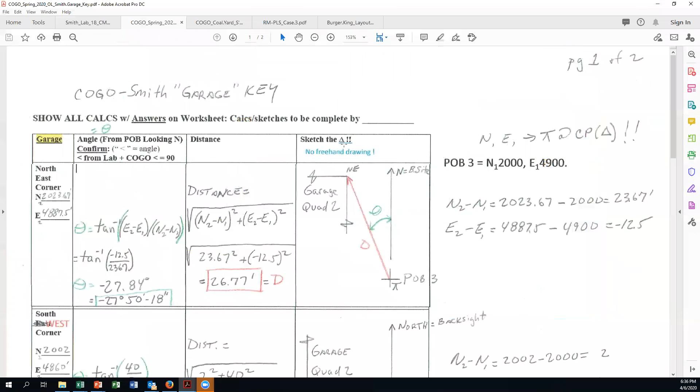So without further ado, let's go to the answer key, which should be on your screen right now. And the northeast corner of the garage - it would be the garage that was part of POB 3.

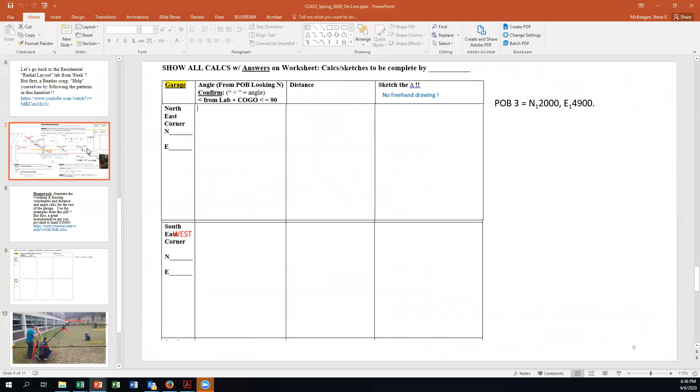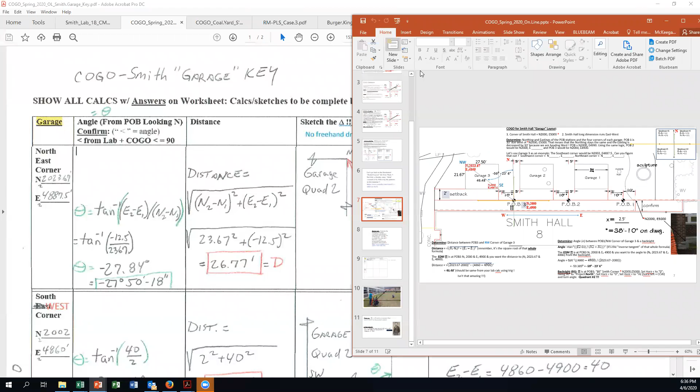So this is the northeast corner. Let's see if we can go with - there we go. So the northeast corner. Let's see, we'll go back to here. This was north 2002. So if you're going up 21.67 right there, then that's going to be 2002 plus 21.67, which is 2023.67.

Whoops, let's see. 2023.67 right in there. Okay, the easting is the same. The easting for the northeast is the same as the southeast, right? Because you're running north-south, so the easting is not going to increase or decrease. So it's 4887.5. So there's our two, that's N2E2.

We're doing all of our calcs at POB3, which we're calling N1E1, which in ancient Babylonian Sanskrit right here - what's that symbol for? Oh, let me do the... Point of instrument, the EDM. Right, so that's the symbol for - you folks weren't using EDM, you were using the theodolite, but basically it's the instrument.

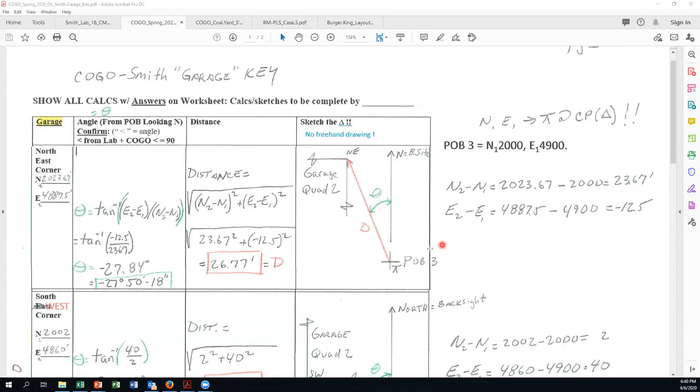If we look at the southwest corner, okay, the southwest corner.

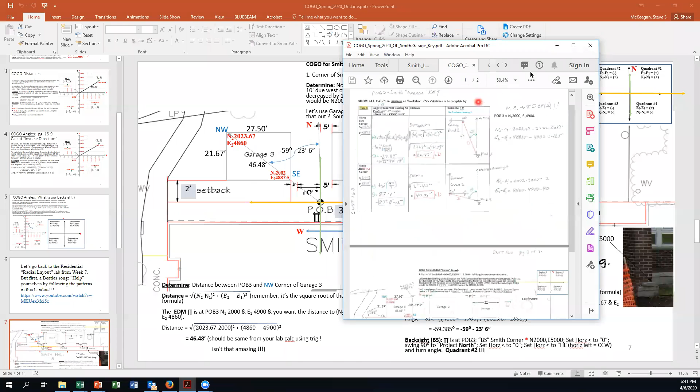Hey, I got a question. The we're basing our easting off the corner of Smith, right? The north 5,000, or north 2,000, east 5,000. It's this point right here. So how'd you end up with a negative 12.5 for your easting up there?

It's not an easting, it's a difference. It's the difference between the two eastings. Oh, okay. So N2E2 is always the point that you want to locate. N1E1 is always the point that the instrument is set up over.

Okay, these are not northing and eastings. These are differences in the eastings and differences in the northings. Same thing here. Same thing here.

Some of you, and actually, I'm glad you brought that up. I think on this, let me run that number here, 12.5 divided by, what is that, 23.67. There was something where, well, if you look on page 7, when you were putting down your formula, I think you put an extra square in there, and I think that might have been what was confusing people.

It's for the angle. Page 7? It says squared, and then you don't square it when you show your math. Right where it goes, angle equals tan inverse of E2 minus E1 divided by N2 minus N1, squared. And that square, I think, is where people were getting screwed up right there. Yeah, oh, I didn't put squared right there. Because when you run the math, it only works if you don't square everything like that.

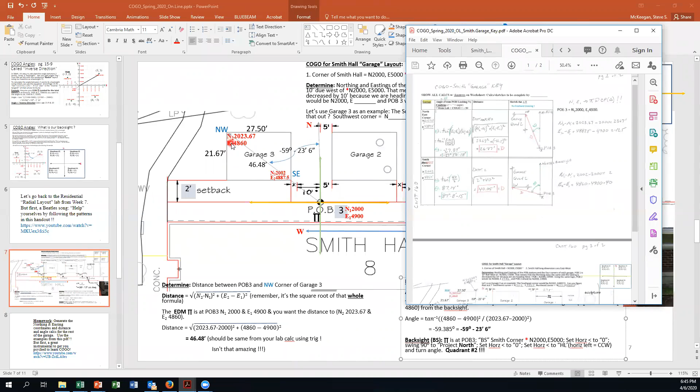So if you go back to there, N2 minus N1 is 2, E2, and that should be a negative 40, right? That should be a negative 40, shouldn't it? Yep. That should be negative.

Mr. McKeegan, I got a question. In the sketch, where that green angle symbol is, is that the angle we were finding? Because I originally thought we were finding that top left angle, like on that corner, the northeast corner.

Well, which one are you talking about? This sketch or this sketch?

The top one. Looking at the top one, for example - this is the northeast corner, and this is the southwest. The angle you're getting is always off the line from your instrument looking north.

If you're in quadrant 1 or 2, that angle is always measured off of the north. Okay, we were looking at the angle on the other side of that red line. No, because we're at POB3 and our garage is over here.

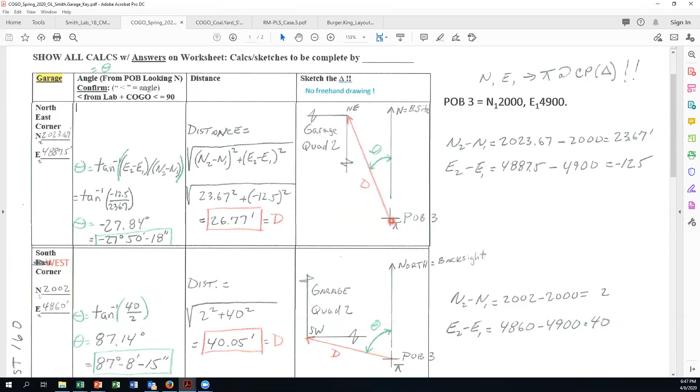Wouldn't, for the southwest corner, wouldn't that be negative 87.14 degrees? Because that'd be a negative 40 divided by 2. So you're still going to have a negative coordinate there for where it's located, correct? Yes. All right, so this would be negative, which makes this negative 40, this negative.

And then that tells you that you had a positive difference in northing and a negative difference in easting, which throws you into quadrant 2.

Because again, what we did was we threw these coordinates - remember these? In essence, you're throwing this same coordinate right here, it transfers over to your instrument setup point, and there's quadrant 1, 2, 3, and 4. So we're in quadrant 2.

Quadrant 2, the difference in eastings is negative, the difference in northings is positive. So on any quiz I give you this - typically on any quiz I give you the formulas, hopefully I do them right, and I give you the quadrants, and you got to plug and chug the numbers.

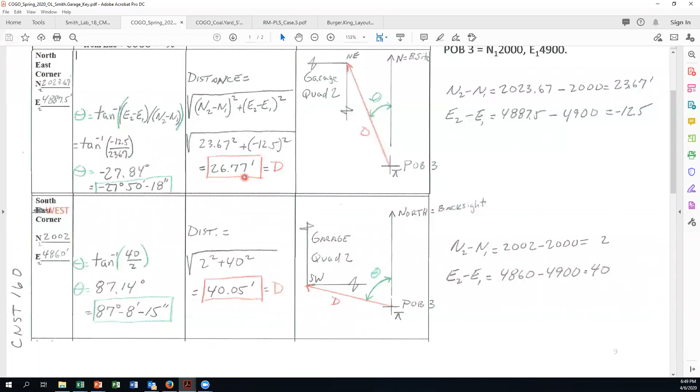And then here on this page, I didn't grade this because I only put on my handout that I wanted the other page. I didn't say I wanted this.

So, but here's POB 2, would be north 2000, east 4945.

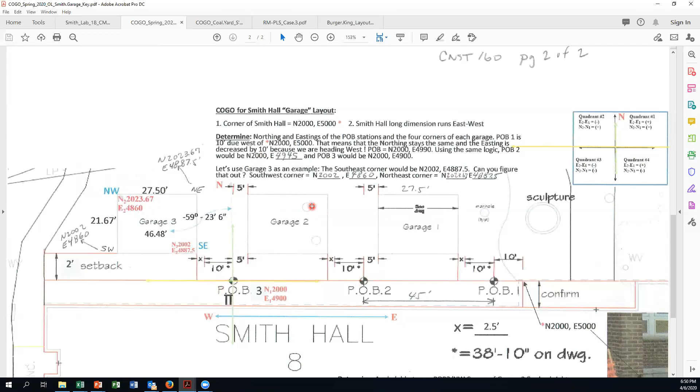So is that starting to make a little sense? I made up another worksheet, a very easy one to go over. Do you have any questions on this one?

While you're thinking, this one right here is on Vanco. Let me see if I can find that.

Are you seeing my Vanco Hall sheet? Okay. So right here it says COGO Coal Yard. So you want to download that one, take a second or two and download that, or you can just look on the screen as I go through that.

So, did that. Now, so let's go to the coal yard - remember this? Shoot, what did I do with that? Let me look that up here.

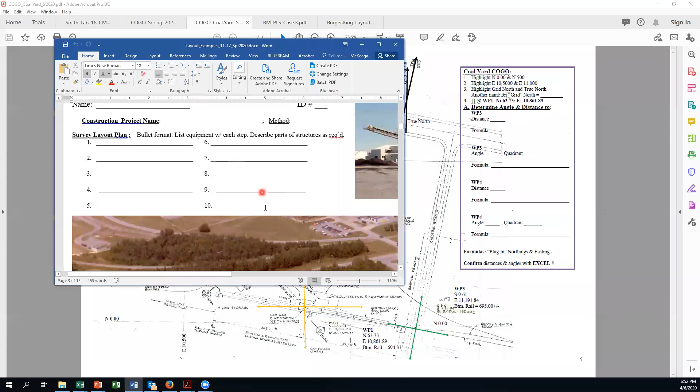Okay, so you might remember it from this. So I took this, you had - we went over how to lay it out, remember you had like working points, and so on.

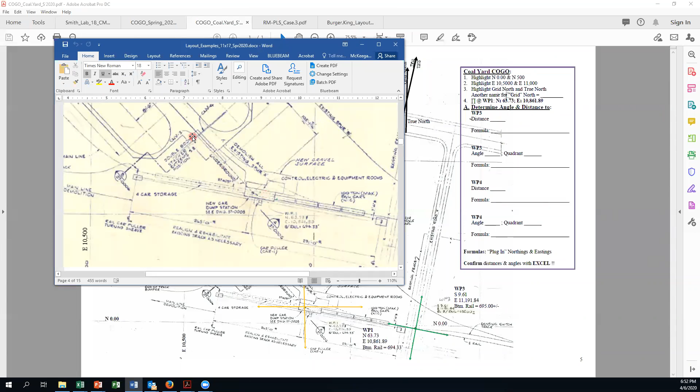This little building right here - no, actually it wasn't little. It had a 30-foot deep foundation, and then an underground conveyor came up from its basement up out of the ground. So there's the building, there's the tunnel exiting at daylight, if you will, and then the two coal storage pads and the center stack pad.

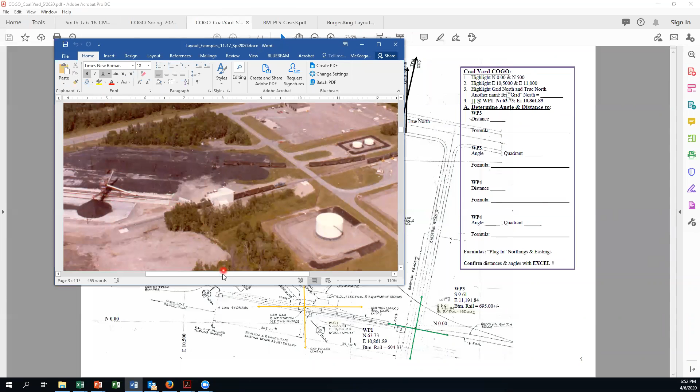And then there's some more photos of it, so just to give you a little view here.

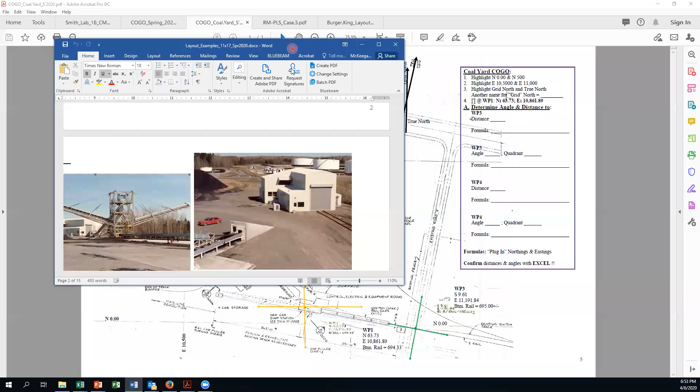So now I've given you this - this is a real easy one. But it's also interesting because they do something that Mr. Van Duzen told us we shouldn't do, and he's right: having negative numbers for a northing or an easting, and let me explain that.

So we've got the same drawing, now I've set up two axes again, the green axes and the orange axes. Now the green axes we talked about - oh, let me grab that thing, gotta push it a little bit.

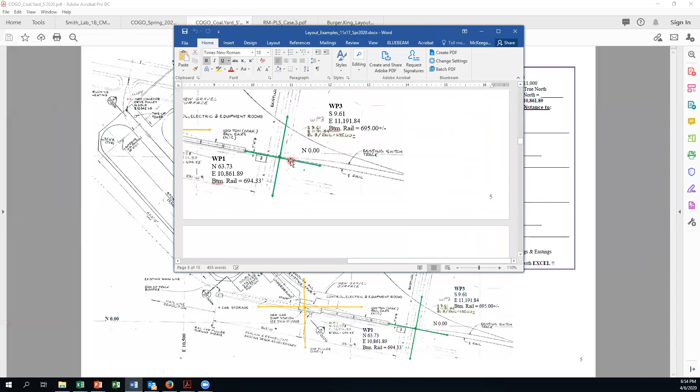So this is in the Word doc. There's the green, there's the orange. Remember when we talked about setting up over the work point, backsighting that other working point in the center line of the track? And then we talked about this angle right here.

That was what angle? Remember we set up here, we backsighted, we zeroed. We did what to the telescope? Used a deflection angle, yes, but what did we do? You had to dump it because you had to flip it 180 degrees. Exactly, you literally flip the telescope.

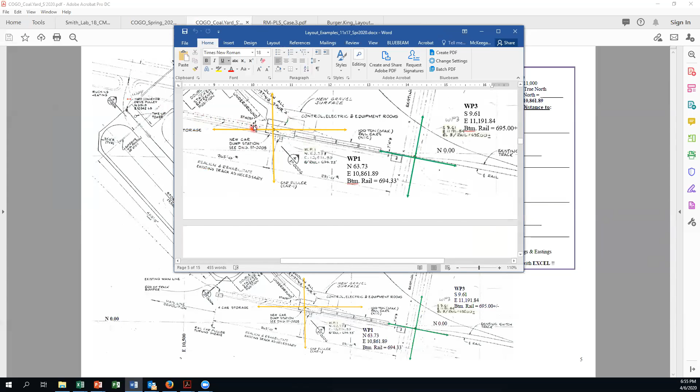So now you're looking this way. You re-zeroed it and you measured 37.4057 degrees, and that gave you your line of sight along the center of that center stacker, that big beast that ran up and down and stacked coal to either side, to either coal storage pad.

So this was set up using radial layout. You kind of lost me there, I'm kind of confused as to what you're talking about just then. Well, so what you got to do is you tell me where am I set up right now?

North 0.00. Nope. Working point 1. Right, so my instrument's at working point 1, and this is what we did when we went over this in the pit. Okay, so you're set up here.

Now what did I do? Backsight. Backsight what? That green point and 0.00. No, that N00 is this line right there. Oh, okay, that's not a point, any point has a northing and an easting. This actually has a southerly and an easting, but don't worry about that.

We called this, we may not have called it working point 3 when we talked about it about a month ago, but I'm set up here. I backsighted here. Okay. And then what did I do?

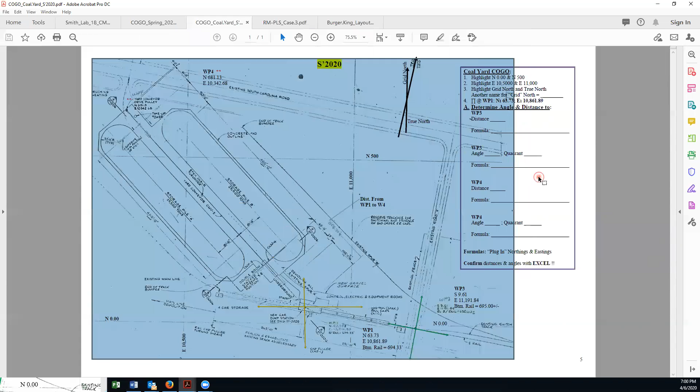So let's go back to, so now I'm on this. So this was used for radial layout, just like you did in Smith Hall, a baseline with really no consideration for north, south, east, or west. So that's those are the green axes.

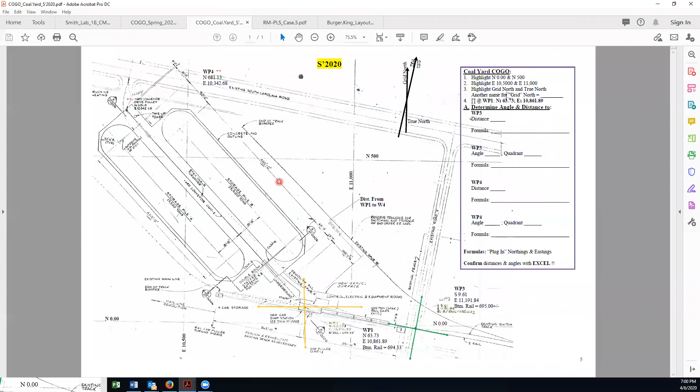Now the orange axes are now being used for coordinate geometry. And what I did in this handout is I typed in the working points. See where it says working point 1 right here? All of this is hard to read, so this is it. So this working point, which is that label, which is that point, now has a northing of 63.73 and easting of 10,861.89.

I believe they made these up. I would not have picked the numbering system that they did, and we'll show you that in a minute.

Working point 3, now instead of northing, it says south. It's like, what the hell do I do with that thing? We'll show you that in a minute. So that's south 9.61, east 11,191.84, elevation bottom rail 695.00.

Never put plus or minus on a design. That's bad. You want that dead on to hundredths. So those are 2 working points. There's another working point within this unloading building, and it's used for the conveyor, but it does not give any northings and eastings.

There's another working point 4. It's the center line of the yard conveyor drive pulley. There's its northing and easting, and I typed them in for you. And I put the 2 red asterisks. And here's my ancient Babylonian Sanskrit that says WP4, working point 4.

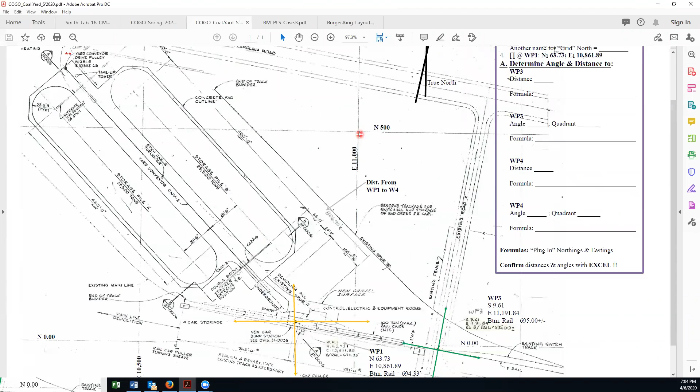So again, they're setting up a coordinate axis. This is east 10,500. This is east 11,000. So the distance running east-west from this line to this line is 500 feet. Does that make sense? So you're breaking it up into a grid.

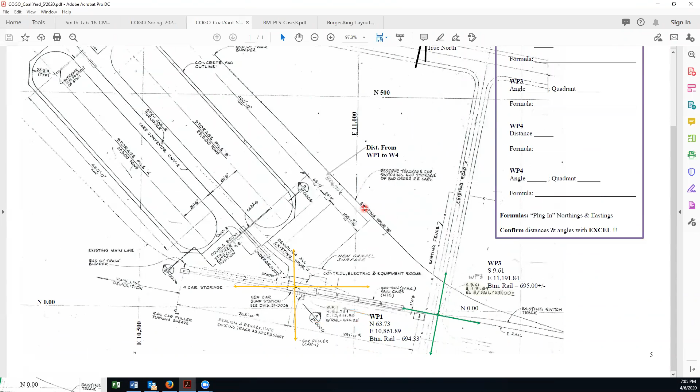Okay, now this is going to be your homework, and I haven't decided when to assign what. So after we go over all 3 of these assignments, you can help me. We'll come up with something that everybody is comfortable with based on your other workload. Because I don't know what your other workload is, and I don't want to load you up all at one time. I'd rather spread this out over a whole week.

So, what's that symbol right there? Because I typed it in and that's the symbol pi, but what do I use it to symbolize? Machine. My instrument, my transit, and my EDM. Back in the day, it was an old engineering transit because from what I can remember back in 1983 when this project started, I think they just had the old transits, no electronics.

So my instrument's at working point 1, so N1E1. This is now N1E1. Okay. If I want to determine the angle and distance to working point 3, okay.

Here's where your final answer is going to go, and here's where you're going to set up your formula. All I want you to show me is the formula looking like this. That's all I want to see. I don't need to see this. All I want to see is this, the distance formula and the angle formula. Understood. So all I want to see is this plus the answer. This for the angle, this for the distance. Okay.

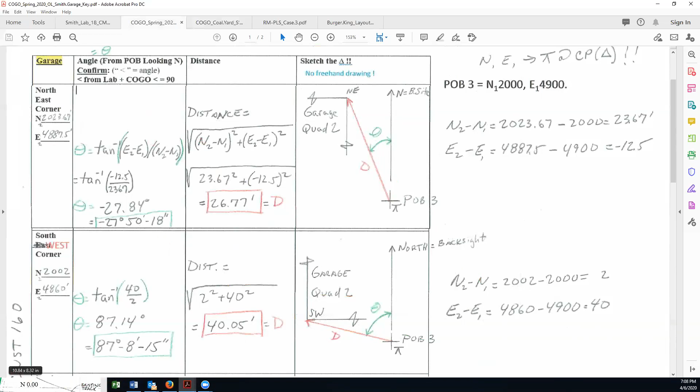So let me find my PowerPoint. Yeah, there's no squared.

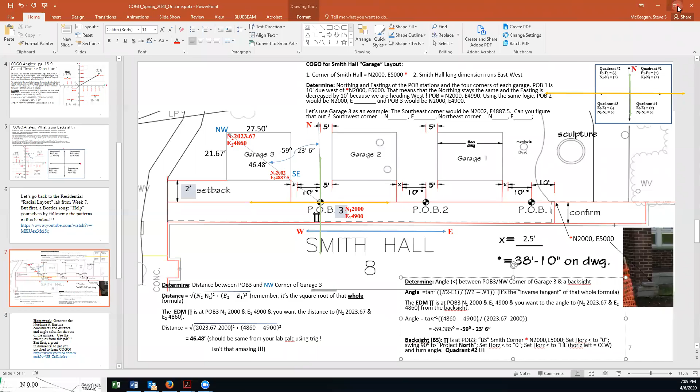Only squared on the distances, folks. Sorry about that. I wonder, I didn't square them. Okay, yeah, that's right. So yeah, these wouldn't be squared. It's only the distances.

So you're going to show the formula, you'll show for distance: N2 minus N1 squared plus E2 minus E1 squared, square root of that whole beast, and then give me the number for the angle and the quadrant. There's your final answer. There's the formula.

Now, how many of you used the Excel? I did use the Excel. I guess I didn't realize I was staring at the wrong numbers and I had to put in the numbers. That was kind of dumb of me to think that, but then I used them a little bit, but I didn't finish it all.

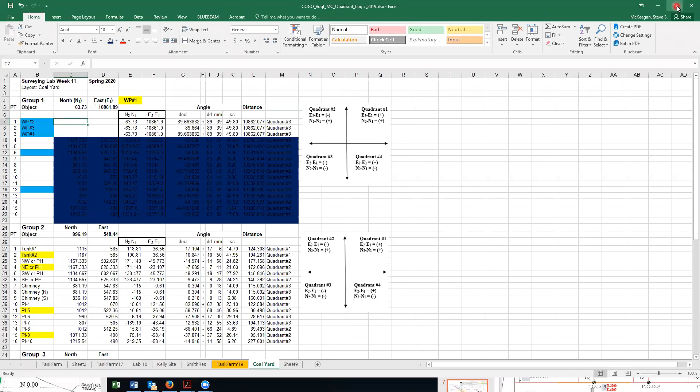N1 E1 is what? Working point 1. There was my 63.73, 10,869. Let me get this. 861.89. Yep, 10,861.89. 63.73. I'm just checking myself to see if I did it right.

Okay, and let's say that we want working, let's do working point 4 because that's easy first. Okay, so what is the...

So let's go back. What's the northing for working point 1? Anybody? Bueller? For working point... do it, 1, damn it, it was the 63.73. Well, for working point 4, oh, and then it's 681.13. 681.13, okay? What's the easting? 10,342.68.

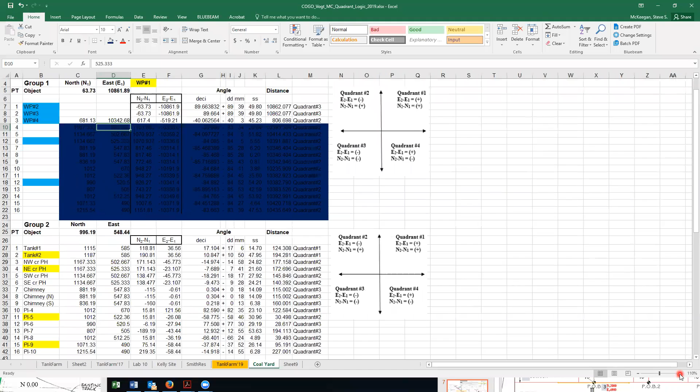There's my, so there's your answers. There's your distance. There's your angle in decimals of degree. It's in quadrant 2. Makes sense because if this is working point 1, it is up and to the left, if you will. A negative difference between the eastings, a positive difference between the northings.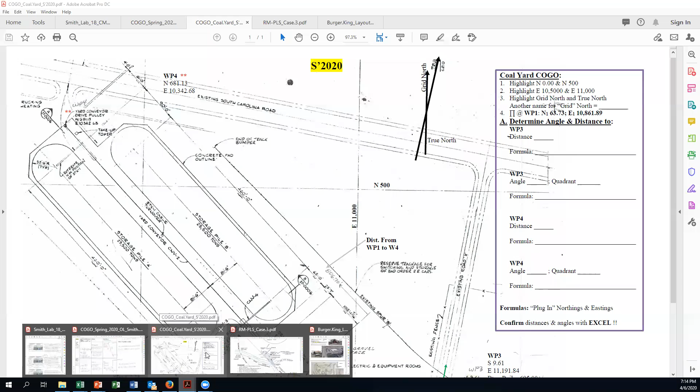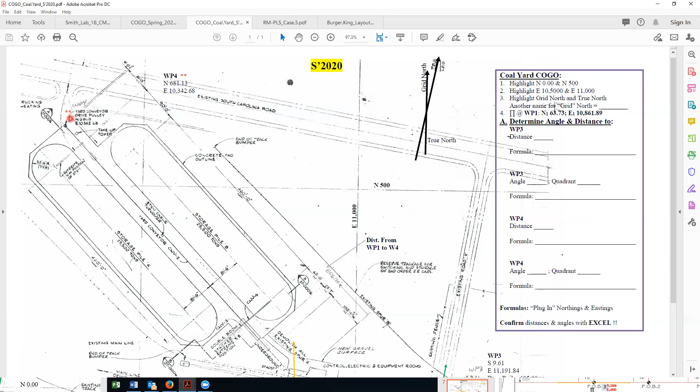But look at this one right here. The distance is 806.698. If I go to this, see these dimensions here? Not that 4-footer, because that's the end of the concrete, but that working point is 4 feet in. So if you add up all of these sub-dimensions, look at that. These guys must have been communists because that's 25'7" and 105' 1 7/16". We don't like those, do we?

All of that should be in feet, tenths, and hundredths. But look at that, I added them up. The distance from working point 1 to working point 4 is 806.70. And our Excel was 806.698, which is the same as 806.70. So that's going to give you your answers.

So all you got to do, you're going to have the answers. What I'm going to look for is, did you set up the formula right? So let's do working point 3. Now working point 3, what is its northing?

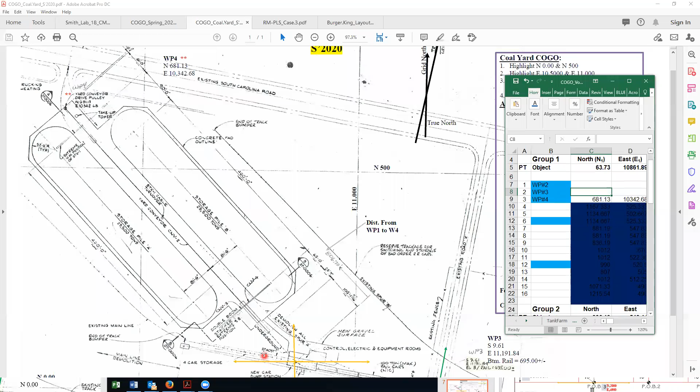So this is going to be negative 9.61, and its easting is 11,191.84. And there's your answer.

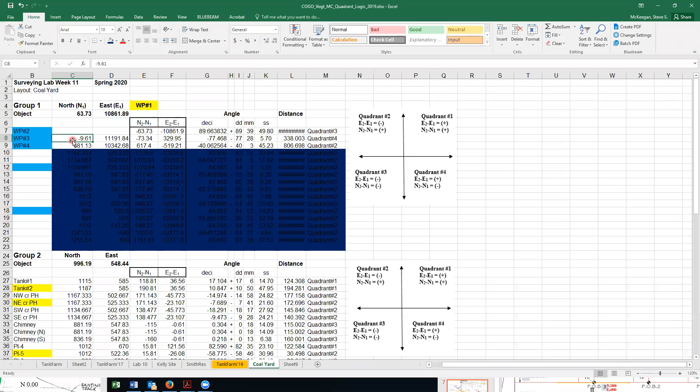Wait, Mr. McKeegan, I'm confused why you put, it said S 9.61. Why did you put that as N in the N1 column? No, I put it as negative. Oh, I get it now. Okay, thanks.

Van Duzen was telling us, remember when we first established it as north 5,000, east 5,000? The reason we went with that is so we didn't have negative numbers. What they did is say this is north 0, but our working point 3 is south of that north 0 line, so that's why they called it south 9.61. They could have said north negative 9.61. Good question, but I like that this example shows you can get into negative numbers with coordinate geometry. They're a pain in the ass, but you can get into them.

And I'm not an expert on this, but man, I'm learning a lot, especially in this textbook. I'm having so much time on my hands. I'm reading more. Ugh, anyway...

So that's going to give you your answers, there's your angle, there's your distance. Okay, 338 feet away, and so on. Now one of the things I didn't put as an assignment is the angle we calculated from working point 1 to working point 4 is measured off of the what?

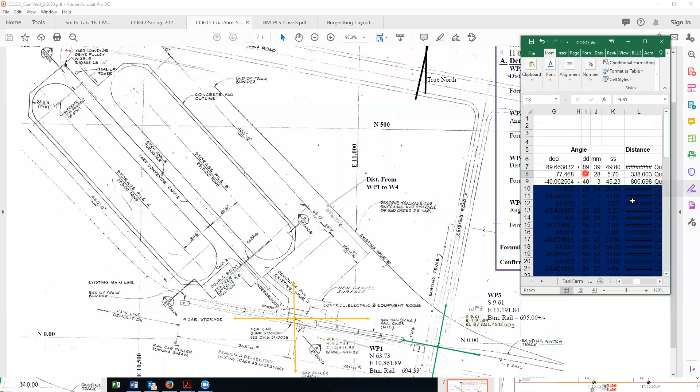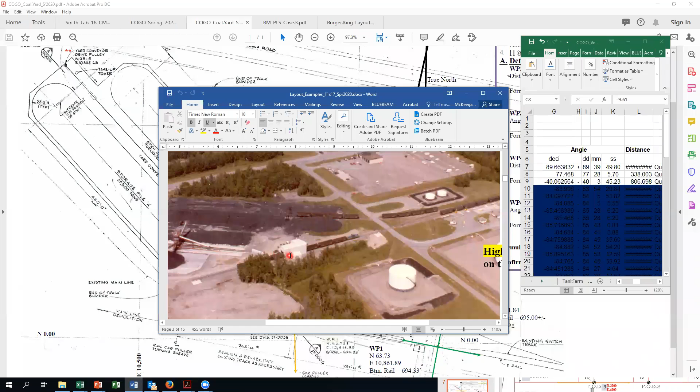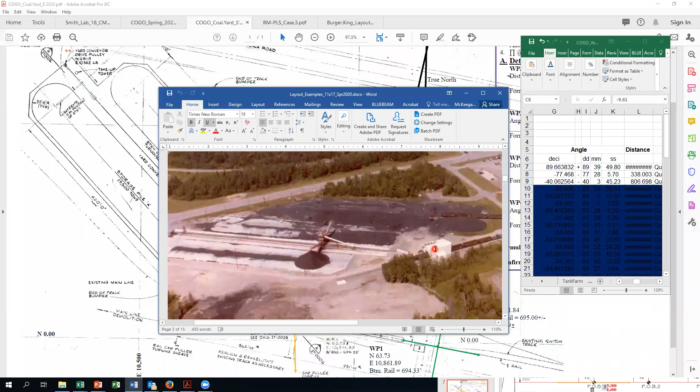So try to visualize what you're doing as you're standing out there. Before this was built, working point 1 was in the middle of that track, working point 3 was in the middle of that track, and working point 4 was just out and set in the ground as a control point by the designer. Although they probably only gave you this point and made you set this one, because they have to give you a minimum of how many points for horizontal control? Two, okay?

So try to visualize what you're doing out there. Go back, you've got pictures of this. Go back and try to visualize building this damn thing. It was pretty neat -- I wish I knew more about COGO back then. So it's a very powerful layout tool. That should be an easy one to do. And then you want to confirm these distances and angles with the Excel. So that's one of the homeworks.

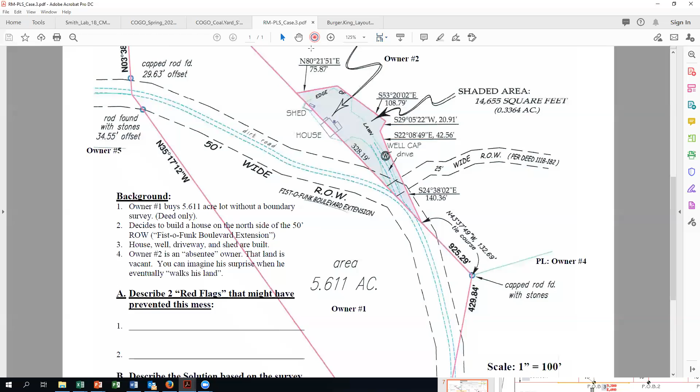The other one, really easy, but another good boundary case study -- this actually happened. I took all the names off, I think I got all of them off, my God, if I didn't I should have. So owner number 1, this is also on Vanco, it says RMPLS, named after my good friend Ron Mullinex. Owner number 1 buys a 5.611 acre parcel without a boundary survey -- they only had a deed. What is the difference between a deed and a survey?

A deed is a rough estimate, basically, of your property line. The survey is like gives you the answer. A survey is a map. A deed is a written description. And the two should give you the same lot.

But the map, the boundary survey map, gives you a visual. So this is that person's property, bounded by these purple lines, 5.611 acres. He decides to build a house on the north side of the 50-foot right-of-way. It was called Fist of Funk Boulevard Extension. That's a nice name.

The house, the well, the driveway, and the shed are all built. Owner number 2 owns, now this little green line is a property line. It's not bold like this because owner number 3 doesn't come into play. But owner number 2 owns from here, damn it, from here

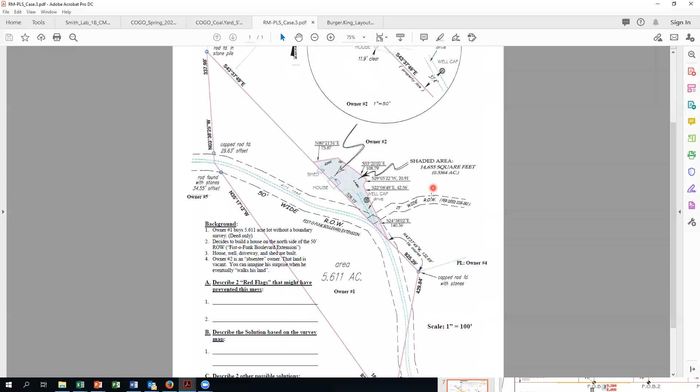So this is your homework. Describe 2 red flags that might have prevented this mess. Describe the solution based on the survey map. Describe 2 other possible solutions. So have some fun with that one. That's the second homework.

Okay, I got one more of these. It's a PIP. This one's a PIP. Whew, Burger King layout.

Did I give you the paper copy of this? You gave us a paper copy of the 10 steps to figure out, on the backside. Okay, so disregard those 10 steps because I've changed it. Where it says 10 steps on your handout is now this.

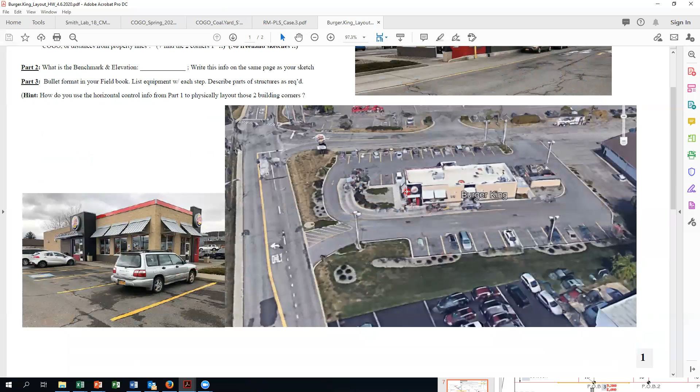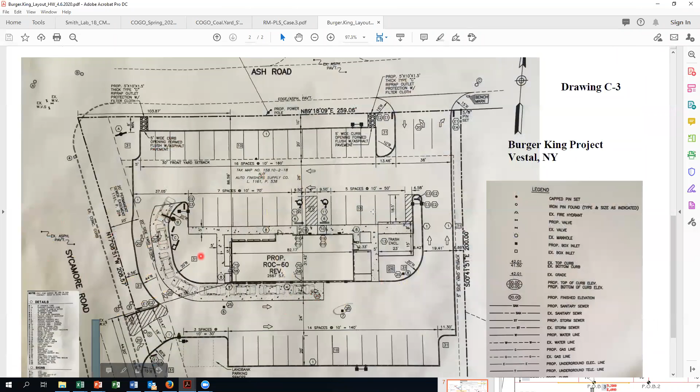So this is an actual Burger King in Vestal, New York. One of the students years ago brought me the drawings, one of which is this drawing, C3, Civil drawing number 3. So here, this is the actual Burger King. Here's the drive-through, which we're all using now. Sycamore Road is right here. Ash Road.

So what I want done is part 1 and part 2, because I want to talk about this a week from tonight and then assign part 3.

Okay, so part 1: make a sketch of the site that shows the horizontal control used to lay out the 2 corners of the Burger King building. The sketch is to be drawn in your field book. If you don't have your field book, draw it on a lined piece of paper.

Hint: did the designer use control points set by a surveyor, or coordinate geometry, or distance from property lines? And the other hint is find the 2 corners that the civil drawing shows measurements to. No freehand sketches, it's got to look nice.

Okay, so you're going to make a sketch and you're going to show all the information that you need to locate the 2 corners of the Burger King. So is it this corner, this corner, this corner, or this corner?

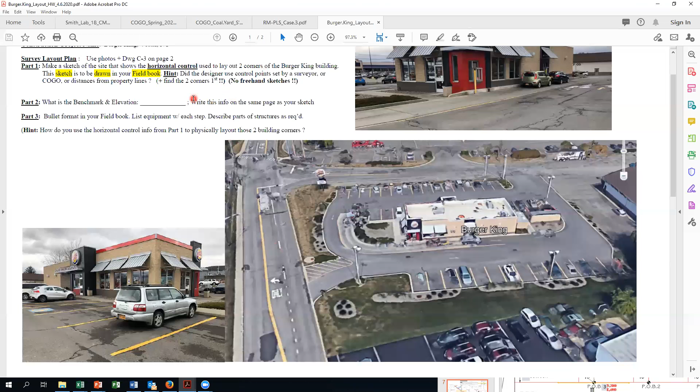In your sketch, you got to go into the civil drawing and figure out where they located this building, how they located it based on either control points set by a surveyor or a designer or coordinate geometry. Do you see any northings and eastings? Do you see distances from property lines? You got to figure that out. And then every bit of information you need to locate this Burger King, you got to show on your sketch.

You might show roads, you might show property lines, you definitely are going to show the Burger King. That definitely helps, you answered my question. But send a picture of that anyway, I'd like to see it, it might give me another idea. Just tell me when you email it.

Okay, let me go find that. Wait, so are we getting another piece of paper, and what should the homework consist of altogether? Do you have your field book? Yeah, that's what you're going to draw it in.

And then did I say the questions go on the paper, and that's it? Or the questions in the thing you sent? This sketch is to be drawn in your field book.

Some of you still have your field book here at Delhi Tech because you can't get your stuff. My kid can't get his stuff from Albany either. It's like, you got to be kidding me.

There's 3 rolls of toilet paper there too. Shouldn't have said that, but it's funny. Oh come on, you got to laugh about that. Absolutely. So I told my kid, just use the Wall Street Journal. But I'm going to first. Whoa, let's get away from potty humor.

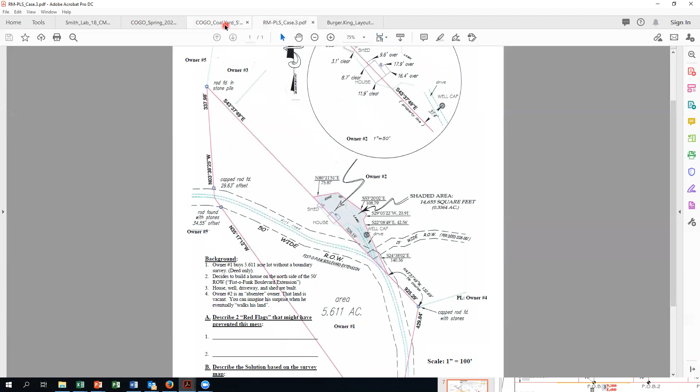Okay, so here's the boundary, that's due Wednesday at 11. The COGO, don't forget to use that Excel, it's going to give you the answers. The COGO is due Friday at 11, again you're getting 2 days in between each one. And then the Burger King is due Sunday at 11.

Okay, how's that sound? Is that fair enough? Yeah, thank you, sounds good. Thanks. Yeah, like I said, you keep me posted on your workload, I'll work, I'll help you.

And then next week in lecture we'll go over these answers, and then we'll go over, I'm going to be working with Mr. Van Duzen on another coordinate geometry problem that you're going to be doing in lab when you get back. The college has not decided when to do that, I'm not sure when they're going to decide. Everything is up in the air right now, as you know, but keep reading the Wall Street Journal.

Now, I got 7:42. And hopefully, let's see.

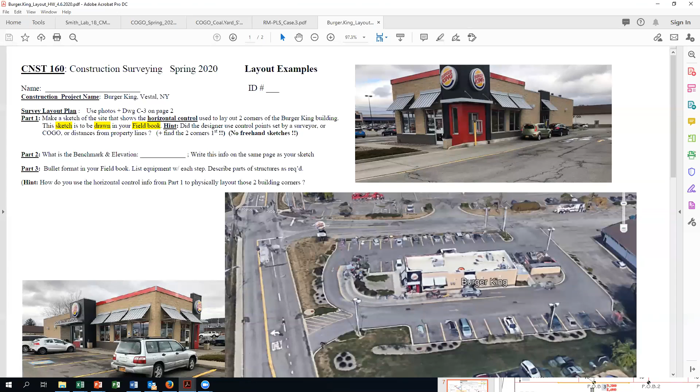I'm not. Yeah, I know. The only ones that should leave are Delaney, Hopkins, Bond, and Mr. O. The rest of you stay. Have a good night, take it easy. I gotta say, it almost felt like you're catching me leaving class early or something, like in the actual school.

Okay, so this is the CNST 150 Heavy Civil information. One thing we're going to do is go over these answers for the estimating for the Smith Hall lab wall. This is the lab that we had you estimate, so you should be able to follow these numbers.

What I would say is take a look at these numbers between now and the next Zoom. We'll do a Zoom Thursday night at 6:30. Again, I'll record it, so bring questions for this, okay?

We're not gonna go through this because I've kept you for an hour and a half already. Wait, what time and when? It's 6:30 on Thursday. Tomorrow, you said? Thursday the 9th, correct? Just so I can write it on my whiteboard here. Yes. Yeah.

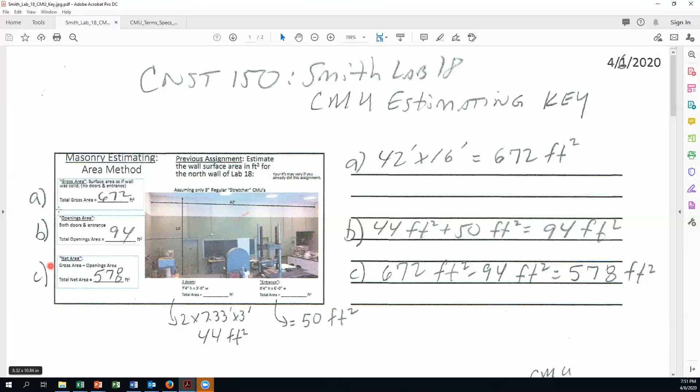You guys gotta check Vanco every day for every class. I know it's a pain, just do it. Check it, and get yourself a whiteboard like one of you just mentioned, or use your phones. Put in reminders for your homeworks. I know this is a pain in the butt, but try not to get behind.

So just come up, follow these, compare them to your answers, and come up with some questions. By Thursday, I'm going to have another masonry estimating problem ready for you. Going over some of these questions will help you for that new estimating. And the new problem is going to be a building that has not just regular stretcher units, but bond beams.

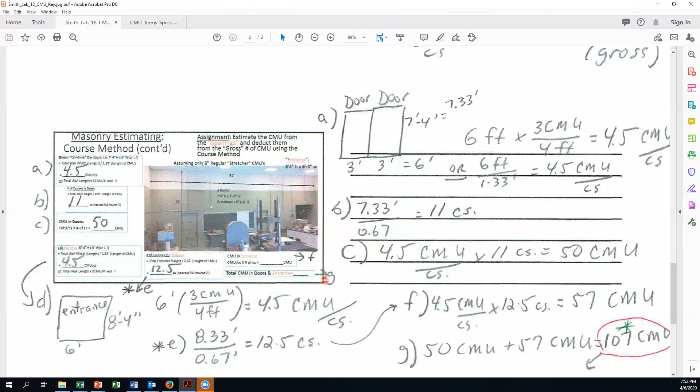And that's what we'll talk about a little bit. I'll show you a little bit on the PDF that I've posted, this one right here. So come up with questions for Thursday night. Anything that you have, any questions here?

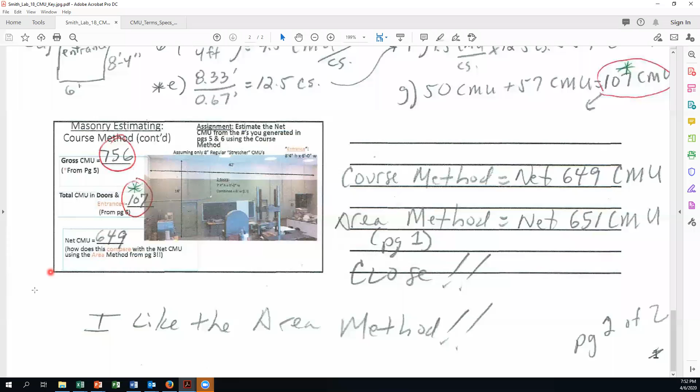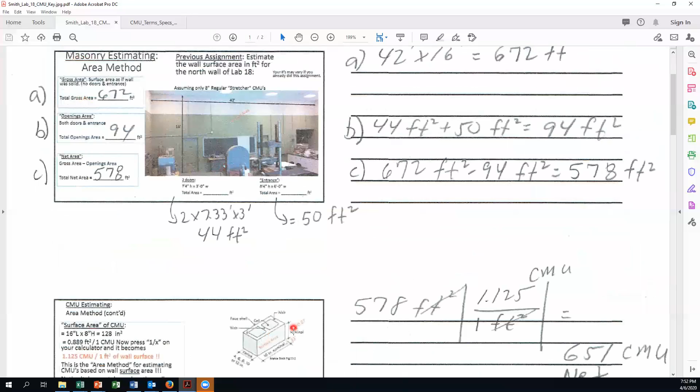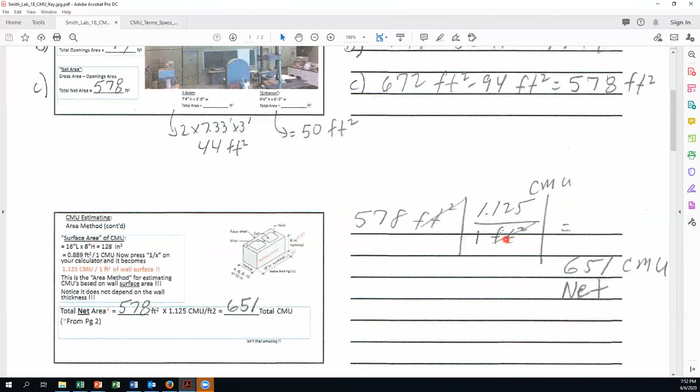Like I said, I like the area method for estimating block. I think it's a hell of a lot easier. Here you're just getting the surface area of the wall, and you're multiplying it by 1.125 block for every 1 square foot of wall surface. Okay? Is this answer key posted on Vanco?

Yes. Some of you have to read my emails. A lot of your questions are answered on that email. Just do me a favor and read the email.

So this is what you have now, it's a kind of a new lecture. Here's some reading that you need to do by Thursday for the next Zoom. Mehta is the author of the textbook for this course. Again, if you don't have the book, you got to go on the buddy system. Just look at the pictures from all those 3 chapters, but chapter 25 deals with concrete masonry units, all the different types. And then the ResCon book that we talked about, take a look at chapter 29, gives some good pictures of concrete block.

Mr. McKeegan, I have an old copy of the ResCon book. What's the name of that chapter? Let's see, you've got the 5th edition? I think so. Chapter 29 is foundations and concrete.

So part of that chapter on foundations is concrete block. It's a good book, I like it a lot. The author taught at Delhi, I miss him, good guy.

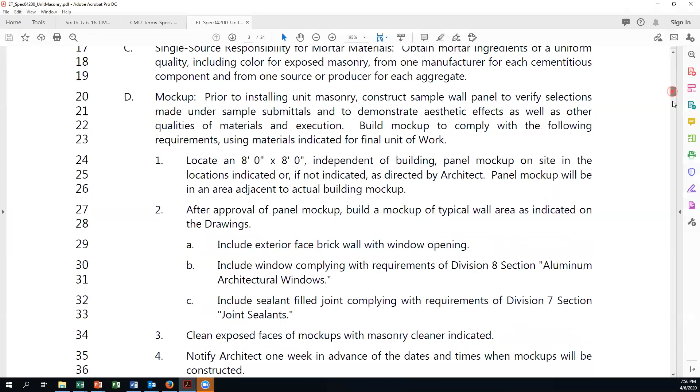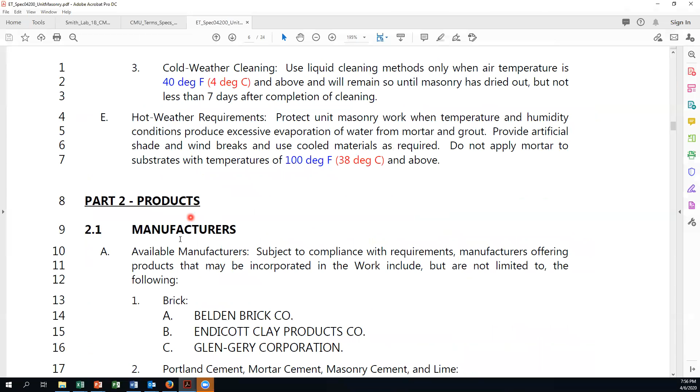Now each specification has 3 parts. Part 1 is general information. Part 2 is products, you know, what type of brick, what type of block.

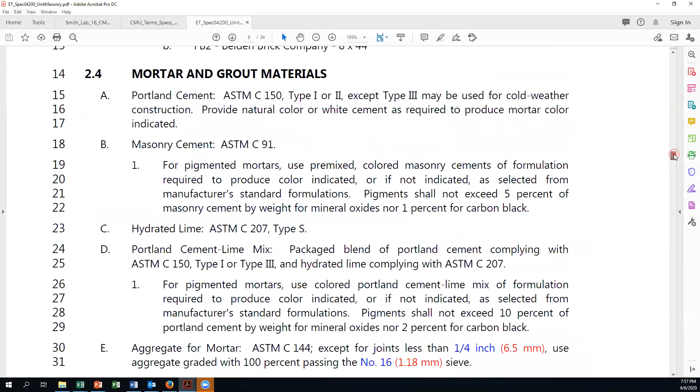Mortar, grout, joint reinforcement, ties and anchors, bent wire ties. And then part 3, it's coming here eventually. Part 3 is called execution. Another word really is, we call it a performance specification, a performance spec.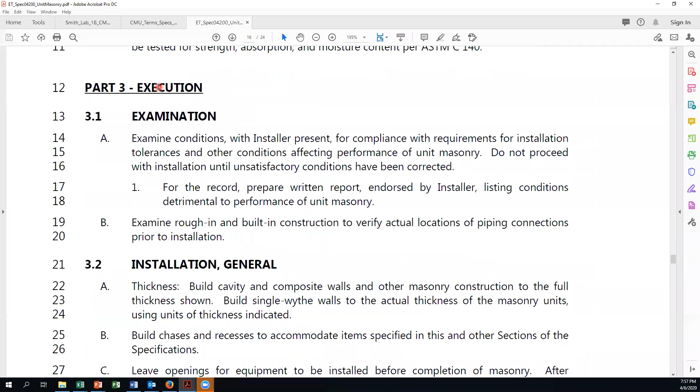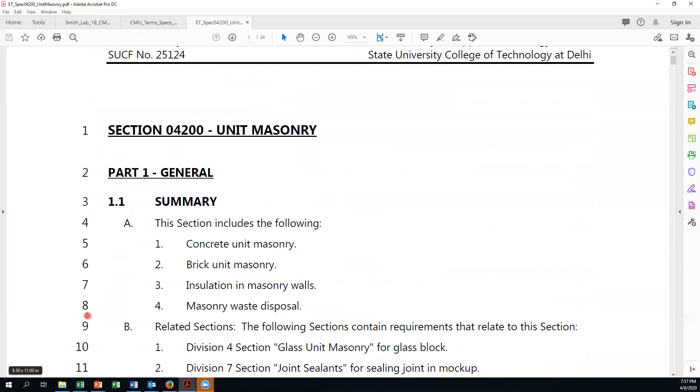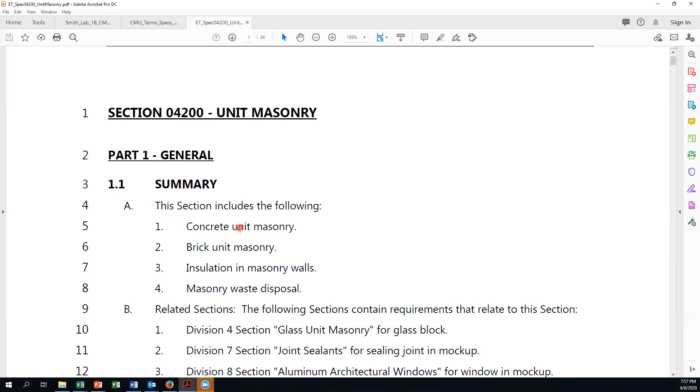So what are all these numbers right here? You've seen them on the concrete specs for ET, this is for the ET building. What are these numbers? Line numbers. So I'm going to ask you in the homework for either a paragraph number. This right here would be this line. If this were the answer, say concrete unit masonry to some general question, it would be line number 5. It would be at the lower right-hand corner, that's page 1 of spec 4200.

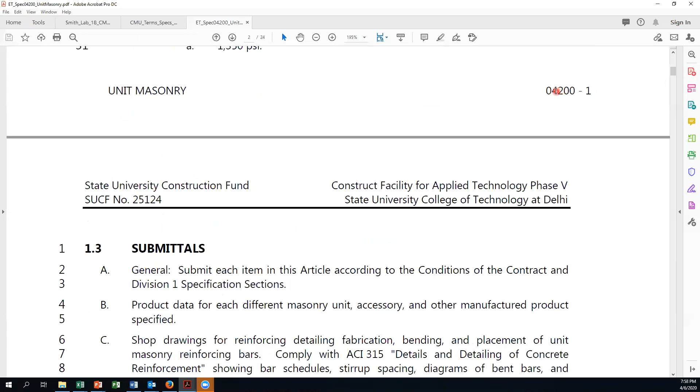So that's page 1 at the bottom of every page. Page 2 of spec 4200 unit masonry. So it would be line 5 of page 1, and the paragraph number would be 1.1 A1. And that's how you would write an answer if it were that. So you got the line number, the page number, and the paragraph number.

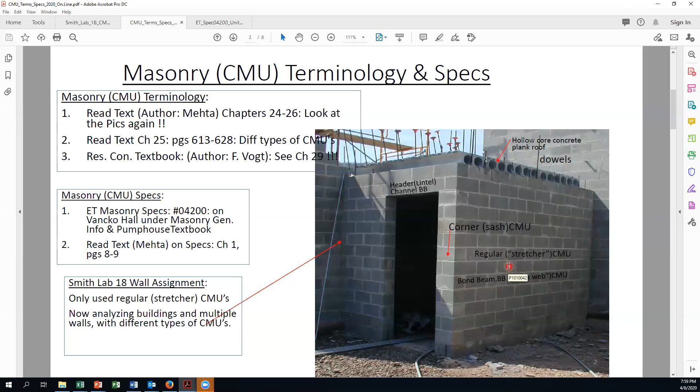Now the Smith Lab assignment, we only used regular stretchers. Now we've got all these different types of block, and that's what you'll get another assignment on Thursday, and you'll probably have 4 to 5 days to do that. When I give you that assignment on Thursday, you can come back with questions a week from tonight after surveying. We'll do that every night on Monday. Most of it will be surveying, maybe 20 minutes, half an hour will be block.

Page 52 of the Mehta book talks about industry organizations. These are extremely important when you get out in the real world, a lot of great sources of info. The 2 trade organizations we're going to use for masonry is the IMI, International Masonry Institute. There's the website, it's awesome. And the New York State Concrete Masonry Association is also awesome.

You've heard of ASTM. There's also - did we buy the Mehta book? That's the book that you used for construction materials in your fall semester, the big building materials book. I have it, Mehta is the name of the author.

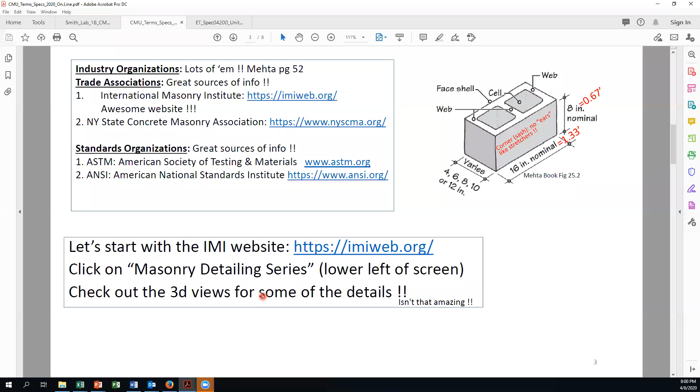And also you'll use it a lot for commercial construction in the fall. So we start out with the IMI website, click on Masonry Detailing Series, just play around with it. I had one that was a great view, and I said I'll go back to it later, now I can't find the damn thing. If you see anything that you really like, send me a screenshot because I'm always looking for ideas.

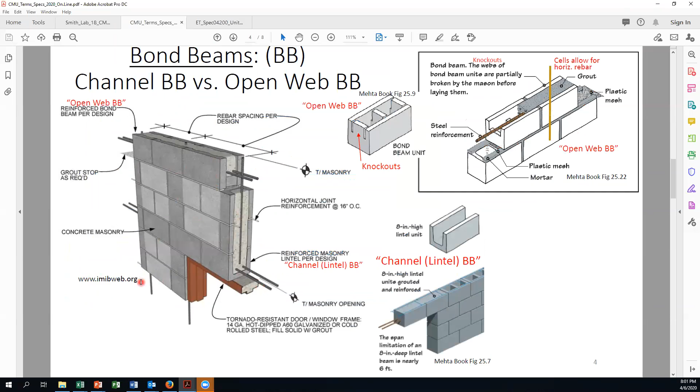And here's a little synopsis, now dealing with a cutaway of a bond beam. And this detail, what do they call that when you're doing a term paper and it's a citation? So I took this from the IMI website. It shows a header, and now you're using a lintel or a channel bond beam.

Okay, it doesn't have any cores, doesn't have any holes in it. It just looks like a channel. And it's used as a lintel over an opening.

Okay, so these are the lintel bond beams, this right here. So you have both vertical rebar, but you've got horizontal rebar that sits in these.

This one right here is an open web bond beam, and it looks like this. And these are knockouts. Here, these have been knocked out in this picture because once you knock them out, you can lay horizontal rebar in there, because they have hollow cells, cores if you will, you can also get horizontal rebar.

So you've got to know the difference between an open web bond beam and a channel bond beam. And that's where the wall gets its load carrying capability, because this is grout, it's not mortar, it's grout. Okay, and we'll talk more about that.

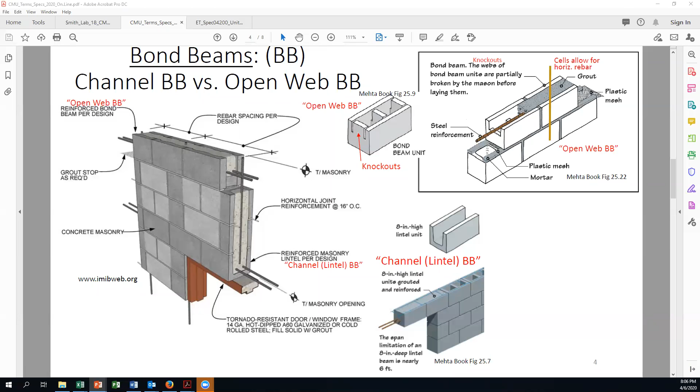But so that's neither an open web or a channel, correct? It's have to show you what's inside, it's not, it's not. Durawall is the name, and you'll see it in the book. When you start studying that book, you'll see it.

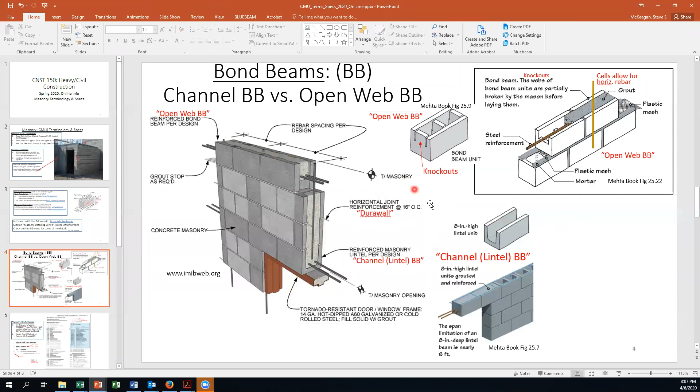So, in the spec... Hey guys, mute that for me, please? So 04 is the division, 200 is the subdivision.

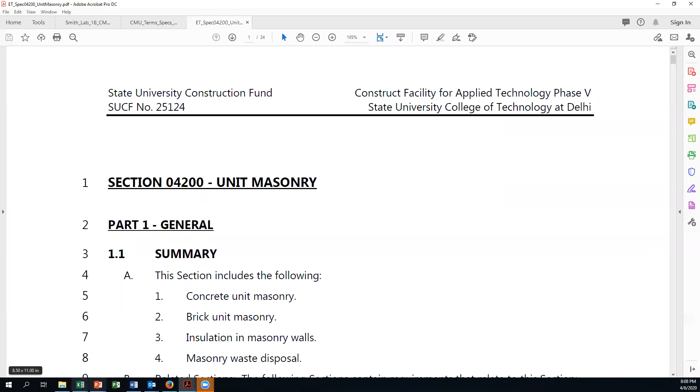And then this is a page out of the spec. Remember we talked about the sentence number, or the line number? I like line number better. This is the paragraph, 1.1A1. And then remember at the bottom of the page, that's the spec, and then that's the page number. This is page 8 and 9, talks about this.

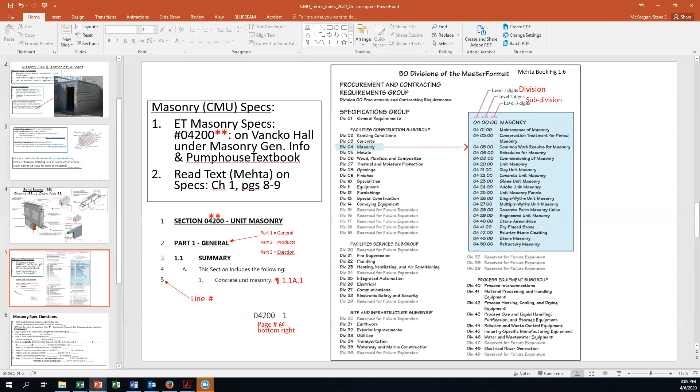We're just dealing with masonry right now. Now, you got masonry spec questions? List the master format division. So what I'm doing, these first two are easy, we already went over these. So what I've done is I've given you the page numbers. There's about 30 pages of that spec.

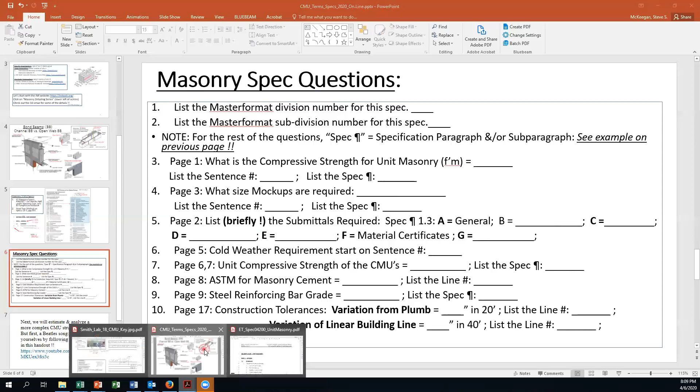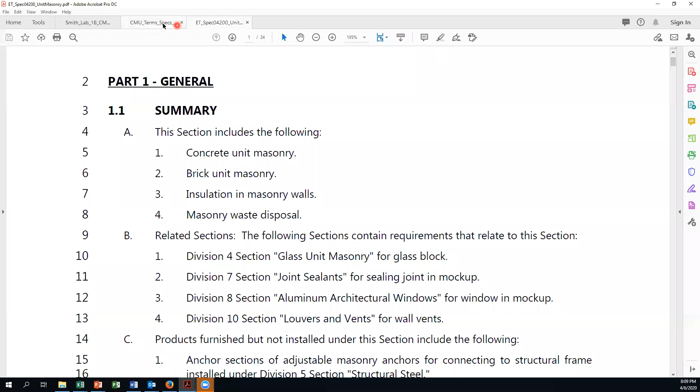I don't want you to have to go back through all of these pages, so I'm giving you the page number, taking you right to the page number. And then I'm going to ask you - I should have written line number, but I wrote sentence number - and also the spec paragraph. That symbol right there is paragraph.

So all of this is due - these questions are due, let's see, Thursday we have a class. So let's have them do... what do you figure, Thursday by 11 or Thursday by noon? Does that sound good? Okay.

There's only 10 questions. Basically, you're going to write these in. If you have to, you can. You don't have to rewrite the questions if you can't make a copy of this to write on. You can just give me the answers, but write down 1 through 10.

And what does it do? Thinking about cold weather requirements, unit compressive strength, the unit masonry, the rebar, the masonry cement, the construction tolerances - we'll talk about that in lab.